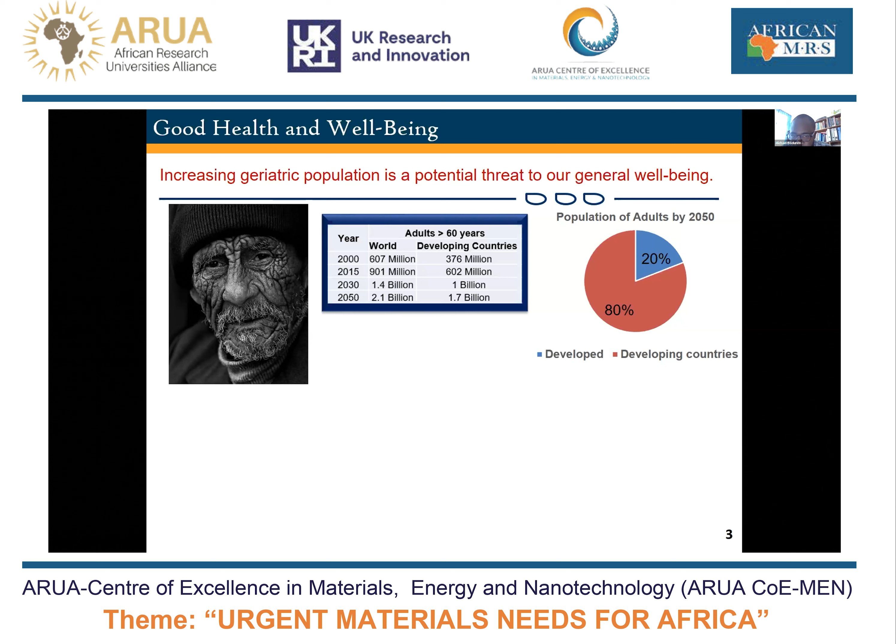So without wasting too much time, we all know that due to technological advancement, we're living longer these days, which is a good thing, but it's also a potential threat to our general well-being and our good health, especially when we think of the future. So by 2030, the geriatric population would have reached 1.4 billion. Then by 2050, the population of the world would be around 2.1 billion, and people who are older than 60 years would be around 1.7 billion.

And one thing comes with old age: the susceptibility to bone fractures and becoming disabled. And if one person in the family becomes disabled, it affects everyone. So that would really affect our general well-being. And 2050 is not very far from here. So we really need to find a way to address this problem.

What is really concerning to me is that by 2050, 80% of older adults will live in developing countries. No single African country is considered a developed country, which means we'll have a lot of older adults. Can they all afford titanium? I don't think so. Over the years, I've been working on reducing the cost of titanium alloys, basically. But I think that if we do not find cheaper ways to beneficiate titanium, we're not going to have implants that can be afforded by poor populations or people who are earning quite low. So I think that we need to find cheaper implants.

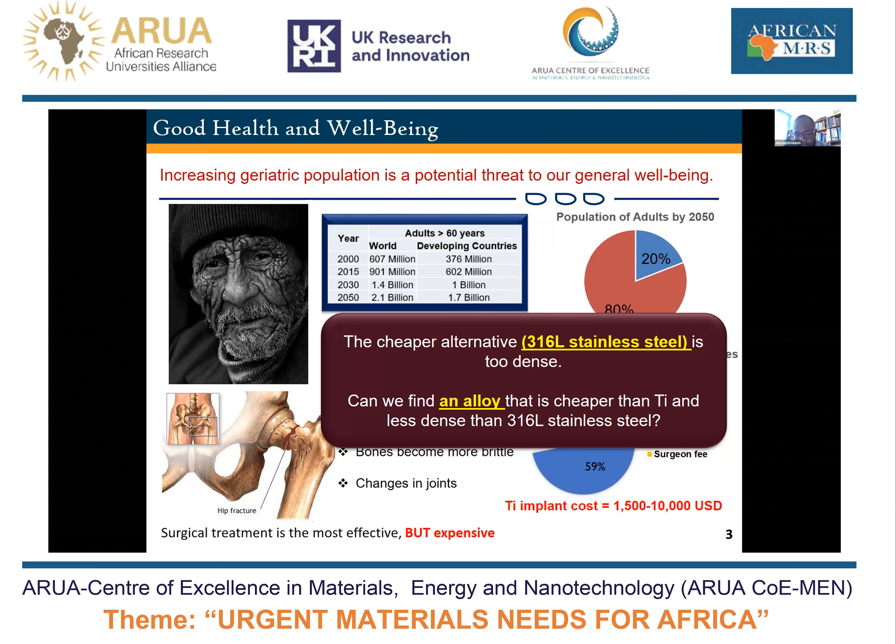Apart from titanium, there is an alternative material called 316L stainless steel that is used for implants. I recently confirmed, while engaging with an orthopedic surgeon, that 316L stainless steel is not even being approved in South African hospitals anymore. And that is because it's highly dense and it causes other problems when used as implants. So we need to find alloys that are cheaper than titanium and at the same time less dense than 316L stainless steel. So do we think we can find this alloy? I thought probably low density stainless steel could be this alloy.

People have created a lot of narratives about steel: it's dying, high entropy alloys are taking shape and stuff like that. But I think the versatility of steel has made it relevant and it will continue to be relevant. So I want to give you an overview of low density steels in general. It was first reported in 1930 by Korter and Ton.

Then in 1958, Ham and Carin actually thought about replacing chromium and nickel in stainless steel with manganese and aluminum. Between the 1930s and 1950s, there was not a lot of research carried out. But of course, the motivation for creating low density steels in 1958 was to reduce the cost of stainless steels, because chromium and nickel are quite expensive.

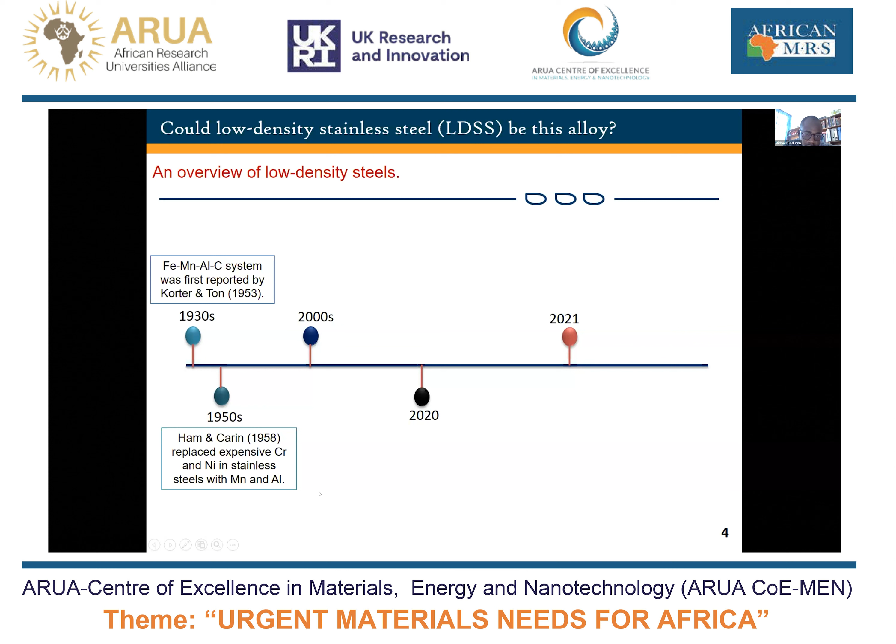And things went quiet until the 2000s. And in the 2000s, because we want to reduce carbon footprint, we need lighter material, lighter alloys that would result to energy efficiency, less consumption of fuel, and lower emissions of carbon and other greenhouse gases. So these alloys then sparked the interest of many researchers. And that was when we really developed the metallurgy of low density steels.

The key alloying elements are manganese, aluminum, and carbon. When you introduce manganese, you reduce the density of the alloys as well as the elastic modulus. But more important is aluminum, because it has very low density. So when you add aluminum to iron, you reduce the density quite a lot. As you can see, you can obtain 1.3% reduction in density for 1 weight percent of aluminum that you add.

But the disadvantage is that there's 2% reduction in Young's modulus. And this is probably the reason why we don't have any low density steel still used in the automotive industry. But of course, adding high amounts of manganese and aluminum to iron and controlling the amounts of carbon could give you high plasticity and high strength. The strength comes from the different types of carbides that precipitate within the grain boundaries. And some also precipitate around the grain boundaries, but it's more beneficial if the carbides precipitate within the grains.

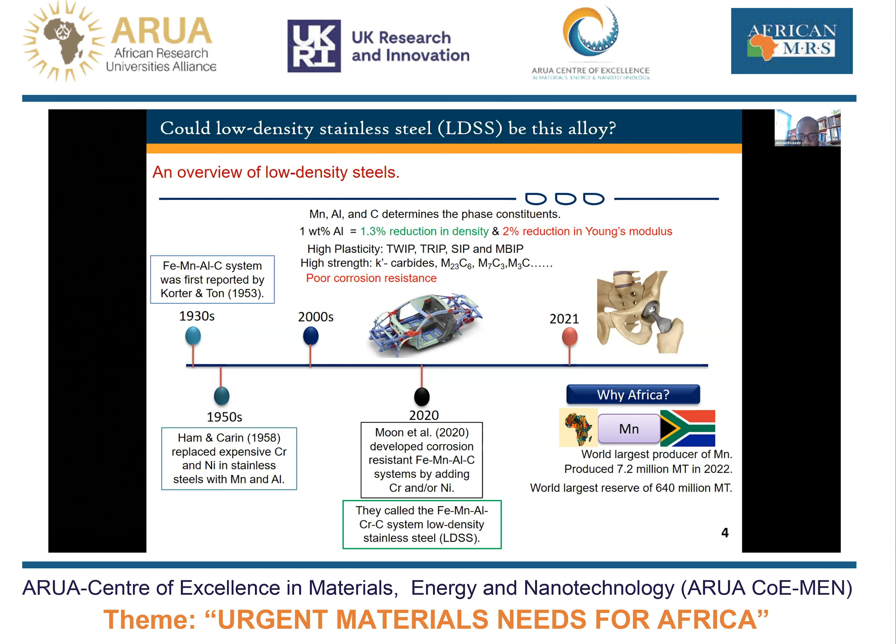So I think this is something that we need to tap into, and we can create another success story like that of the 3CR12 alloy if we continue working on this over time, especially if we can develop this material for a commercial-based application, which we think maybe the biomedical application would be an interesting one. So now let me give you an overview of the preliminary experiments we carried out.

We looked at different alloys in this composition range, and we carried out Thermo-Calc analysis to do phase predictions, and then we did melting, and then we did spark analysis to come up with the composition, because when you're producing these alloys, aluminum easily evaporates, especially when you're producing via casting. So you need to really be sure of the composition that you're arriving at.

We did microscopy and XRD analysis to establish the phases, because depending on the alloying elements and the amount of the alloying elements, you could have different grades of low density steels or low density stainless steel. And after we did this, we got some results, and those results made us consider carrying out thermomechanical processing, which I will also talk about.

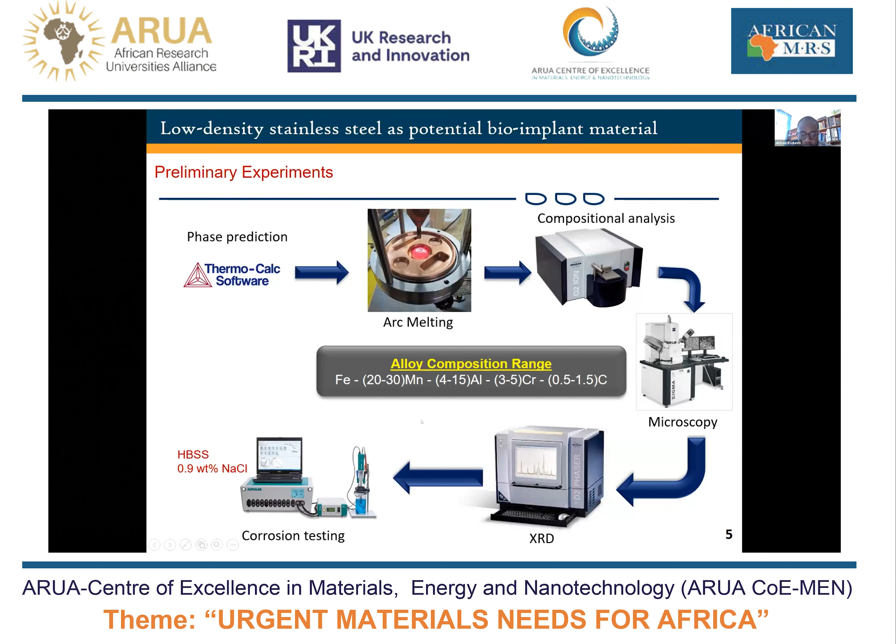So let me just give you a few of the results that we've obtained. So in 2021, when we started, what we tried to do was to test the cast alloys in simulated body fluids, carrying out corrosion on them. And I'm just showing you one of the many results that we obtained, but this table is what is more important. If you look at the 316L stainless steel that we used as the base material, it's a commercial grade, mind you.

Now you see that the low density stainless steel grades have a corrosion rate that is 10 times lower than that of 316L stainless steel, and this is just in the as-cast form, both in Hank's solution and of course in 0.9 wt% NaCl. These two solutions are considered simulated body fluids basically. So that was quite interesting. Yes, from the curves you will see here that in terms of corrosion potential or Ecorr, the 316L is superior.

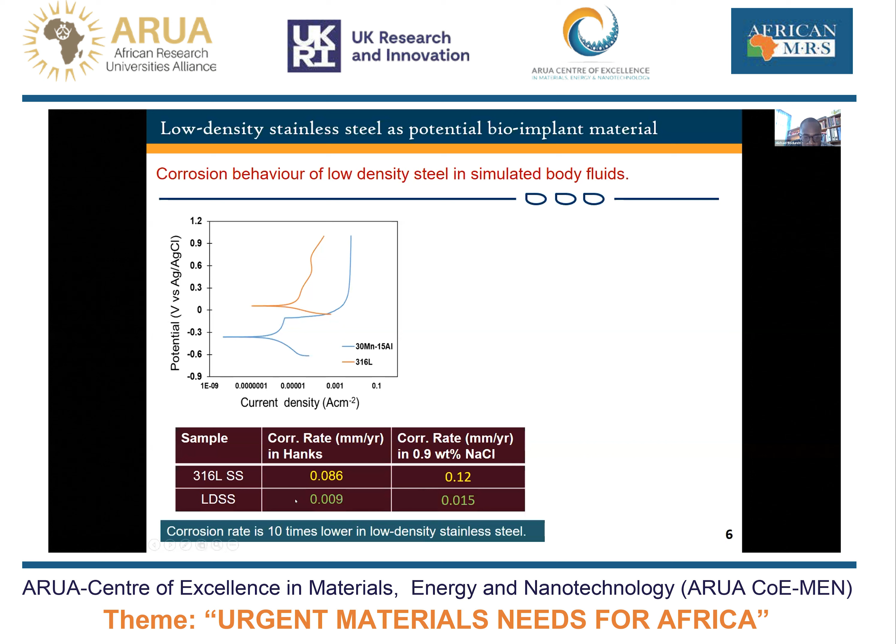But I learned from Prof. Sandenbergh that what is most critical is the corrosion rate, because when corrosion starts happening, how fast is it happening? And that's what we want to focus on. So we thought that this is quite good. And considering that this is a commercial grade alloy and we were just testing the as-cast sample, we thought that having this corrosion rate was quite beneficial. It's 10 times lower than that of 316L stainless steel.

But we found something quite interesting. We saw that in the low density stainless steel, there is lots of pitting, because the pitting occurs in the dendritic region. So you have the carbides and the matrix forming the dendrites, and I think the chloride ions attack the interface between the carbides and the matrix. The matrix could be a mixture of ferrite and austenite, depending on the amount of manganese and aluminum and carbon that you had.

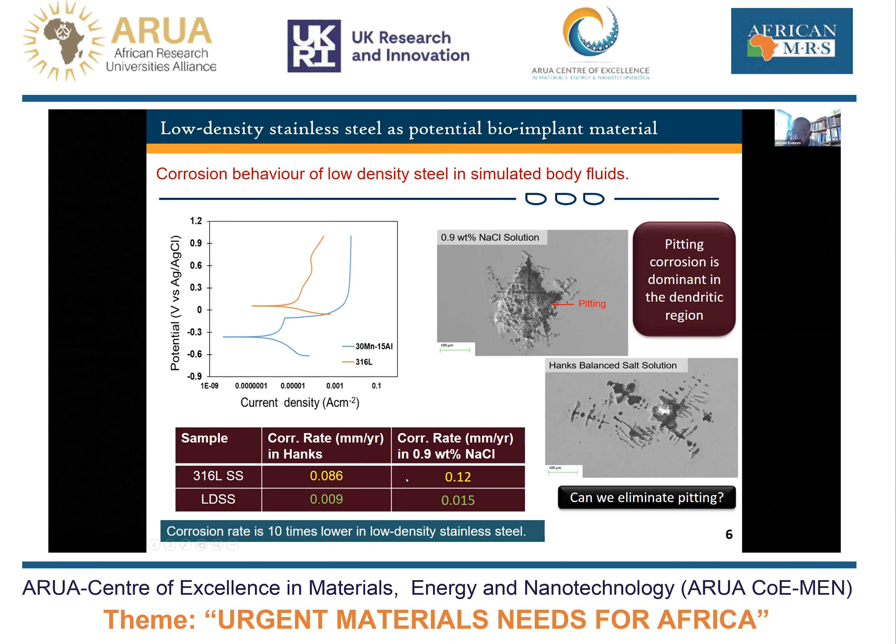So we saw this, and we thought if we try as much as possible to subject this to thermomechanical processing, we can get rid of the pitting. But how that affects corrosion rate, we didn't know. So what we did next was to carry out thermomechanical processing using optimized parameters: popularly reported temperatures and strain rates for deforming this grade of steels based on literature.

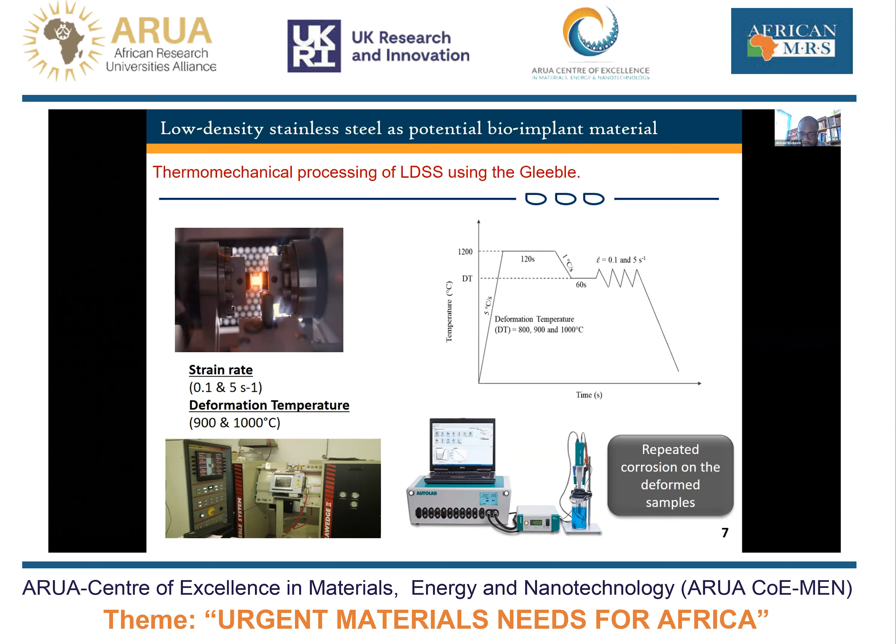Hi, Doc. You have one more minute. Can you wrap up? Okay. Yeah. All right. Okay. Thank you so much.

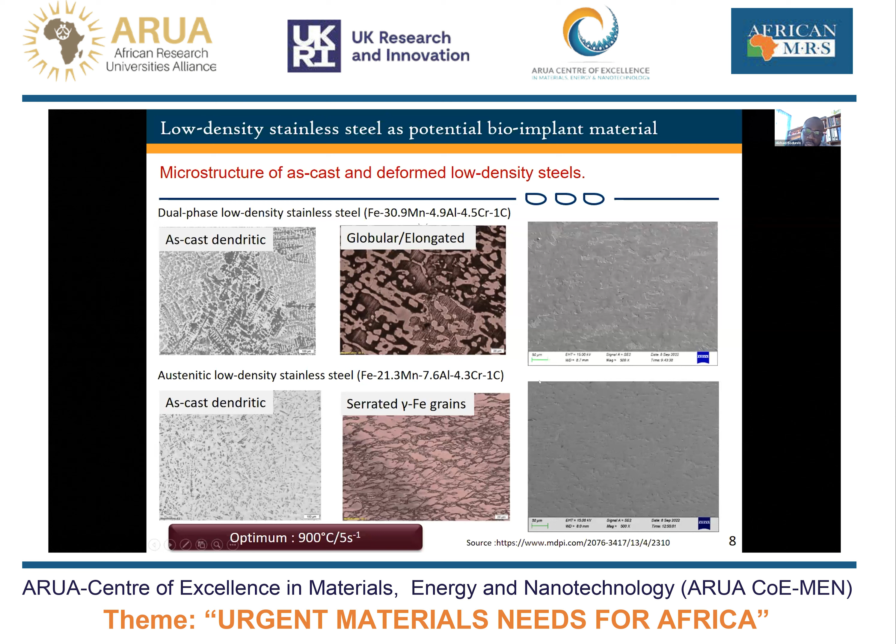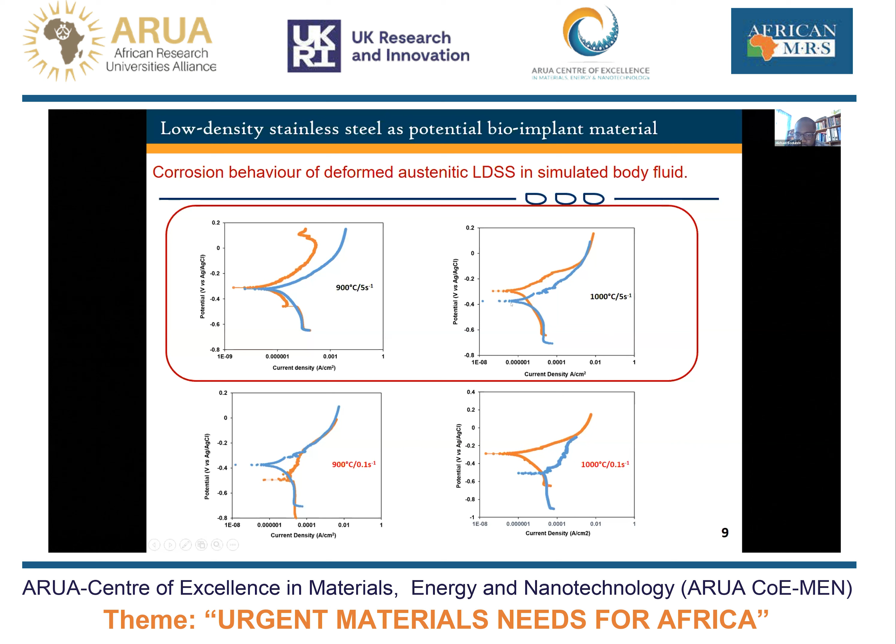And what we see is through thermomechanical processing, we were able to change the microstructure. But does this affect the corrosion results? And you can see that in this case, when we use this particular parameter, we were able to find results that are nearly reproducible. And in terms of calculating the corrosion rate and Ecorr as well, we see that for this same parameter, it's quite close and the standard deviation is quite low.

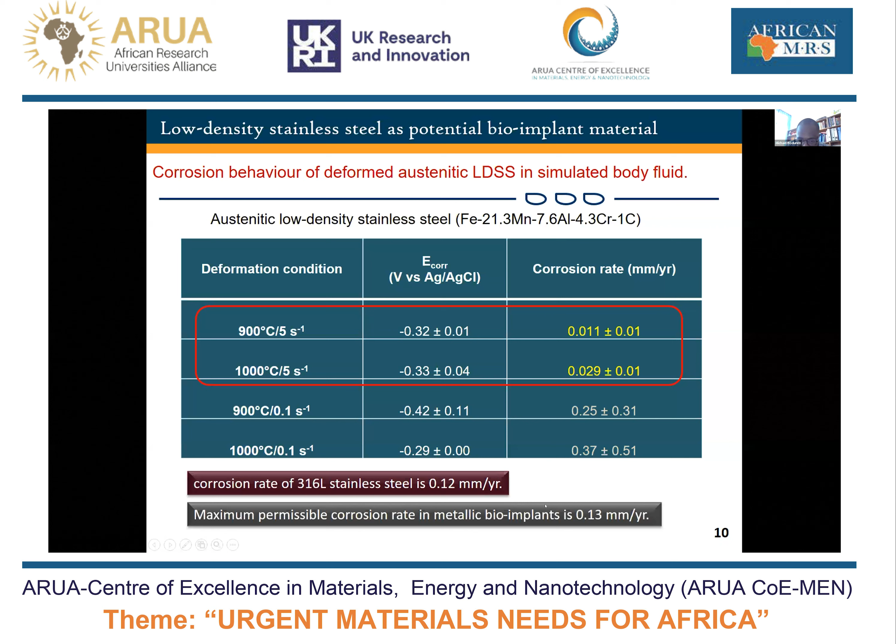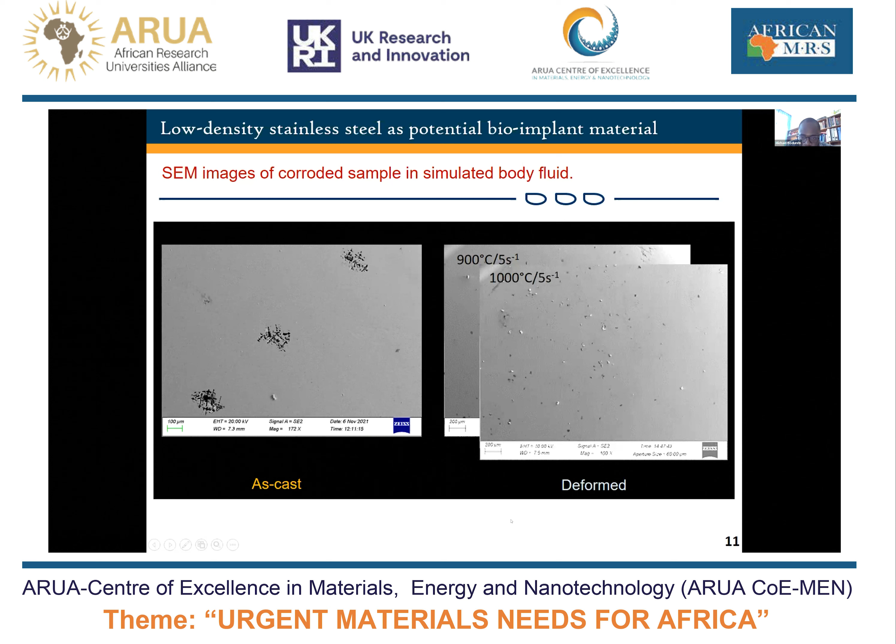When we use a strain rate that is much slower, the results are not necessarily reproducible, which shows that there are some variations in the microstructure and we need to optimize the thermomechanical processing parameters. But for these conditions, we still see that the corrosion rate was 10 times lower than the 316L stainless steel, and of course was lower than the maximum permissible corrosion rate for bio-implant alloys. So we looked at the microstructure of those particular samples, and we could see that we were able to reduce the effect of pitting, and this is another microstructure confirming that.

And what have we learned so far? What we've learned so far is that maybe low density steel might be a promising material for bio-implant application. We could improve the microstructure through thermomechanical processing. But of course, it's crucial for us to still optimize those parameters. And this is what we are currently busy with.